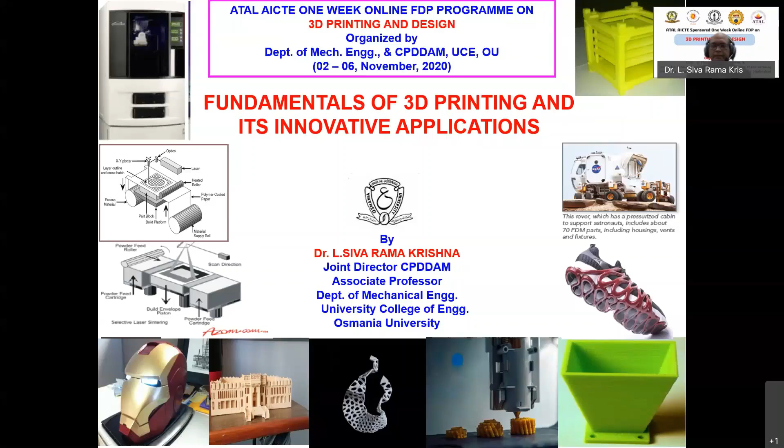Before that, I would like to say we have a state-of-the-art Center for Product Design, Development, and Additive Manufacturing. This was established in 2019, upgraded from the Center for Prototyping, Testing Industrial Products, established in 2009. This center has got so many high-end technologies like SLM metal 3D printer - what Dr. Padmanabhan sir said in ARCI, the same type of machine with an advanced version we have in our center. We have selective laser sintering, SLA DLP technology, Polyjet, Ultimaker S5 Pro, FDM 3D printer, and Artec scanner.

Professor Sriram Venkatesh is going to tell all these details, because the main person behind establishing this state-of-the-art center is Professor Sriram Venkatesh. His hard work and dedication made the center possible. He is the director of that center, and I am the joint director.

The outline is, as I said, fundamental 3D printing. I'll be concentrating on these areas: aerospace, sports, entertainment industry, food processing industry, jewelry industry, electronic industry, construction industry, interior decoration - this is another beautiful area where a lot of home interior decorators are using this technology. And I'm going to tell you what is the future of additive manufacturing, right?

Let us say the definition of 3D printing as given by Terry Wohlers is a technology that produces models or prototype parts from 3D CAD model data, CT MRI scan data, and model data created from 3D object digitizing systems. Simply, you can produce a product by using a 3D model. You can produce a 3D CAD model directly from scratch, or you can get it from reverse engineering by scanning the existing object, or if you're in biomedical, you can take a CT MRI scan, and from that, without developing any tooling or programming, you can directly produce the part.

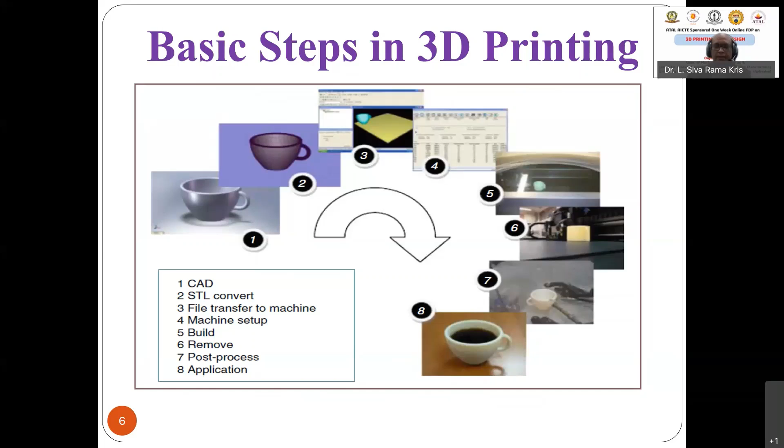Of course, in biomedical applications, how it is different, I am going to discuss in my next session lecture, because that session I'm entirely concentrating on how 3D printing can be used for biomedical applications. I hope you understood what are the steps involved in 3D printing.

Now, how do you classify 3D printing? There are different ways. For example, in the Chua textbook or other literature, they classify based upon the type of input material you are using - like whether I am using a resin, a liquid based one, or a solid based one, where solid means raw material in the form of wires, etc., or I may be using powder technology. As Sir was telling in the morning, metal printing, most of them are powder based systems, using fine powder etc. That's how they used to classify earlier - the old classification.

But now, as per the latest ASTM guidelines, they classify this into 7 ways. So on screen, even though I am starting with liquid, solid, powder as the basic one - liquid may be molten state or polymerizable. If it is a molten state, that means material extrusion process, like your FDM printer.

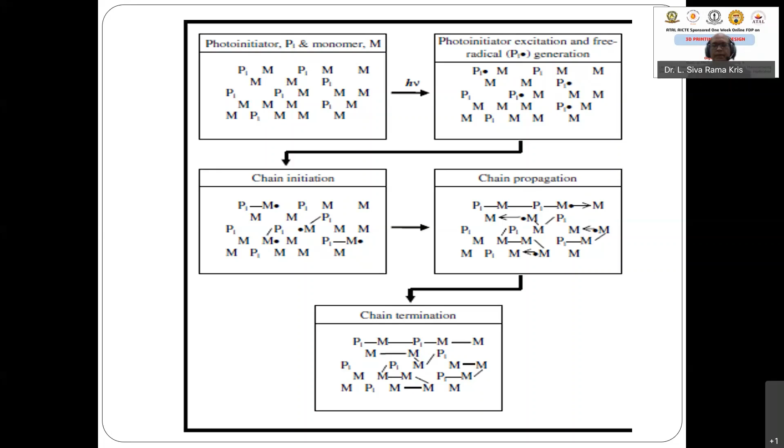Now, how is this process done - how is the part built in a vat-based photopolymerization technique? Let us observe this video on the SLA process, showing how 3D Systems uses this concept of building the part in SLA using photopolymerization. Let us observe this video, then we will go to it.

Are you able to hear the audio of this video? Hello? No sir, you are not able to hear the audio? No sir, it is not running now. But when I am running the video, are you able to hear the audio? No sir, we didn't hear the audio, sir. Okay, now I will explain.

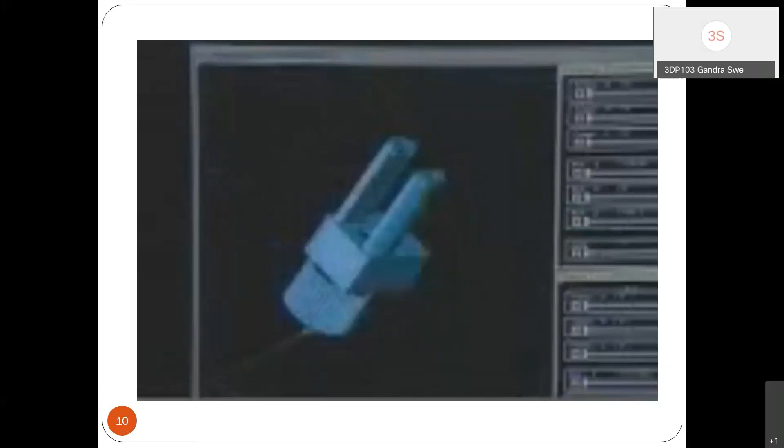So this is the you can see

You can see here the part is first sliced into a number of layers. Once you make a number of layers, the laser beam moves according to the cross section of each layer and exposes the liquid resin to that cross section. That liquid resin becomes hardened for that layer, and the platform goes down. Again, a new layer will be spread on it - you can see here.

So you can see here, this is sliced into a number of layers. Once we slice it, this is the build platform, and the liquid layer will be spread on it, and the laser beam will move in the XY direction. So the build platform moves in the Z direction, and the laser beam moves in the XY direction, and one layer gets exposed to that laser beam, then that becomes hardened.

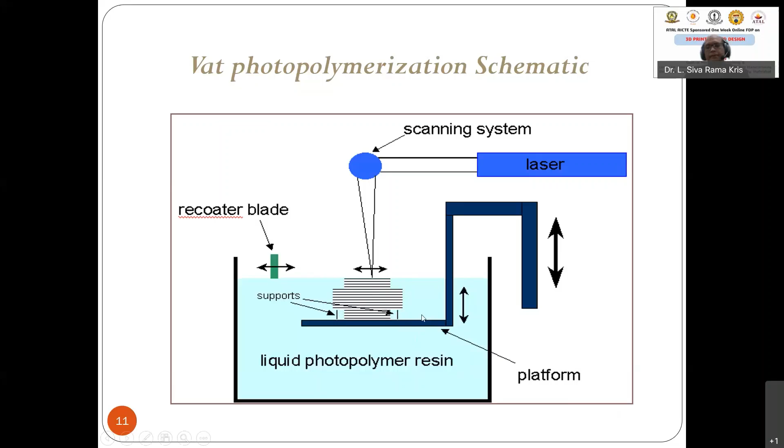Whenever you have overhangings, you require a support structure, because liquid doesn't have its own strength to support itself. You have to make separate support structures in this case. So this is what you see in a vat photopolymerization process.

The next most famous process you might have heard of is FDM. It is the most popular process used, and it is cheaper compared to SLA, because in SLA you are using a laser beam. Here there is no laser beam at all. You are using a heated nozzle and sending the wire through the heated nozzle and extruding it.

So this is called the material extrusion process. These parts have higher strength because you are applying some force, like in forming processes, where forming parts have higher strength compared to other parts. You are applying some energy which is stored in the form of strain energy. FDM also has higher strength compared with other processes, but the surface finish will not be as good.

Its key features are robotically guided plastic extrusion. They use thermoplastic materials - earlier it was thermosetting, now this is thermoplastic. Low temperature to high temperature metals, with accuracy of plus or minus 0.005 inches. You can have water soluble or wax support here. So that is how this material extrusion process works.

You can see in this video how the FDM process runs. Let me show the schematic diagram of what happens. The wire is used in a dual extrusion process - you have dual nozzles here. One wire is used for making the part, another wire is used for making the support material. When you send this wire through the extrusion nozzles, the nozzle heats that wire.

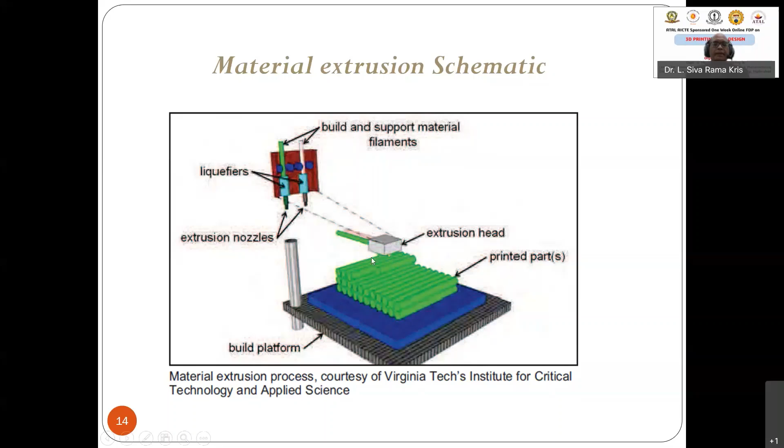In fact, we have a fused deposition modeling Ultimaker S5 Pro in our lab, and a demo will be shown to you of how that machine is used. The working principle is extrusion technology, and compared with SLA it has higher strength, but the surface finish is not as good as SLA technology because it's not a resin-based process. The support structures can be built from the second nozzle, and whenever you complete the part, you can remove the support structures very easily.

Let us watch this video on how FDM works.

Are you able to hear the audio now? Are you able to hear? No, sir. I'll see whether I can run the audio file directly. What is the problem, I don't know - yesterday it was running fine. Are you able to hear this? No, sir. Stop sharing. Is it asking for any kind of share file or share video option? I have to set the audio options.

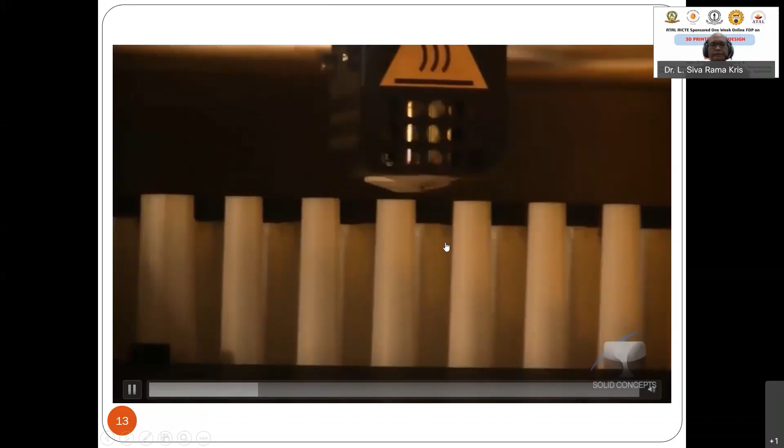You can see here, this is the nozzle through which it's a dual extrusion nozzle. It will produce, see how it is moving in building the part layer by layer. This is the nozzle through which you get the extruded filament coming out. These are the spools of wire through which it is fed through the nozzle. These are the two nozzles you have here.

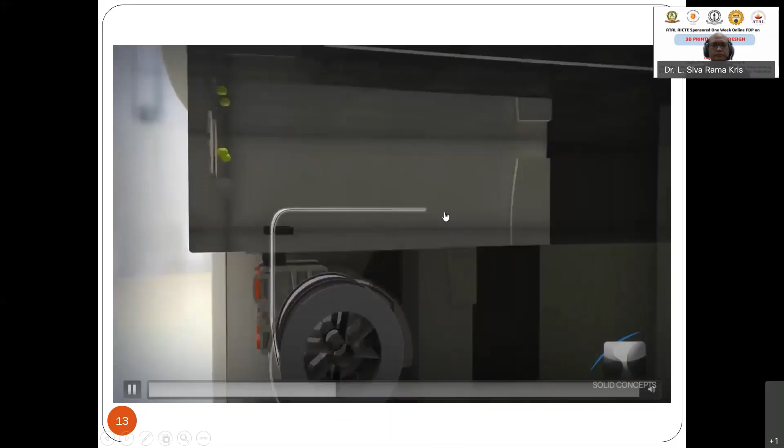By seeing the video you can understand. This is support material, one nozzle, and the other one is for building the part. So you can see such a complex structure you can build using 3D printing. This white color is the support structure and the black color is the actual part that you want to build. So both of them are built in parallel here.

See, the problem is surface finish. You can see, I am removing that. So you have to do some of these post-processing things.

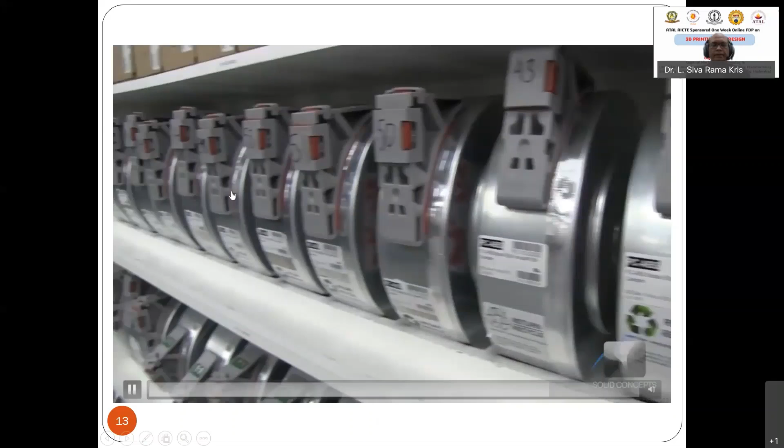You can have different varieties of spools of wire. You can use PLA, you can use ABS, you know, you are using composite materials also. Now there's thought, metal extrusion process is also coming up. It is fed in the form of wire and you are producing the part. That is your metal extrusion process.

So comes the material jetting machines. Material jetting process uses inkjet printing heads to deposit droplets of build material. So here the feature is you have a print head and support head, combining high precision milling and no ash content thermal expansion wax patterns for metal casting you can use. You can use it for jewelry, dental and medical applications, and you can get a high level of precision and high accuracy here.

So let us see how this technology is used for polyjet technology. We are going to have a demo of polyjet also in our center, we are having polyjet technology. Let us now see how this material jetting process is used for building parts using the polyjet process.

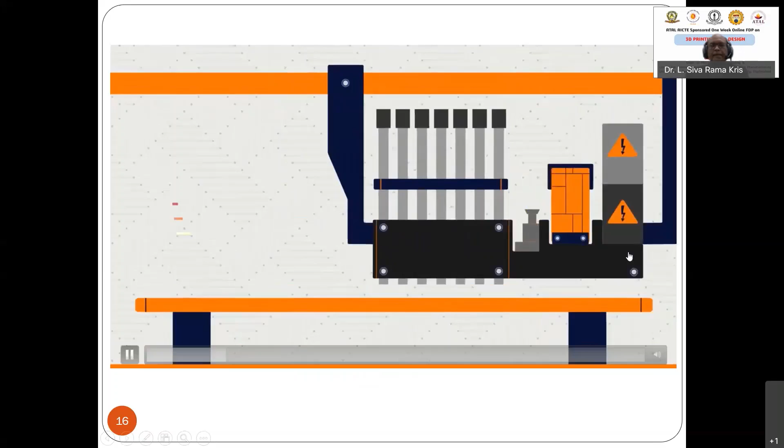It's like an inkjet printer that you use in your home. It will drop the liquid plastic and you have a UV light. We are having a Stratasys polyjet machine with us. So you can make heat resistant materials and durable materials. You can use it for prototypes.

So this basically helps a lot in biomedical applications. In the film industry also it is used a lot. This is developed by Stratasys, very famous, very high-end surface finish you can get here, but the cost of developing this process is very costly when compared with FDM and other technologies. When compared, it is costlier than SLA-based technology, right?

There also you use resin, here you use resin, but the way you build the part is different. It is jetting technology, so you are not using any kind of laser or X-ray, you are using a light, UV light here. So as you see in the video, this is what happens in material jetting. You are having drop on demand, DOD technology you call it.

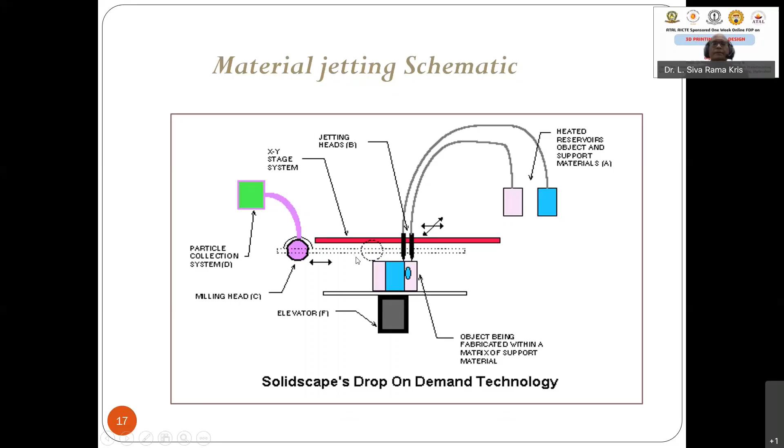Now coming to the next one is the binder jetting technology. Here what happens is, in the earlier case you are spreading the liquid through nozzles in jet-like droplets, like this. But in this case now I am using a powder.

In that powder I am dropping adhesive ink, like here also you have inkjet prints. On the powder I am dropping glue, so I am attaching one particle to another with the help of glue, and I am adding one layer after another, building the part.

The advantage of this technology is it's like a color inkjet printer, you can produce colored parts. For example, you want to explain to a student how a particular part looks inside, you can make it with different colors and give a good explanation to the student how it works. Similarly, if you are an architect and want to show your final building how it looks after coloring everything, you can build a part easily using this technology.

So here also I am not using any laser beam, I am not using UV light, but I am using a glue. That's why it's cheaper.

When compared with the selective laser sintering technology, it is not having that much accuracy and strength like your SLS process. It can be used for demos and prototypes, etc. So it doesn't require any support structures.

The reason is the particles which are not subjected to that glue will act as a support structure for the remaining part which are subjected to glue. So the overhangs, etc., below you have a powder that itself will act as a support structure.

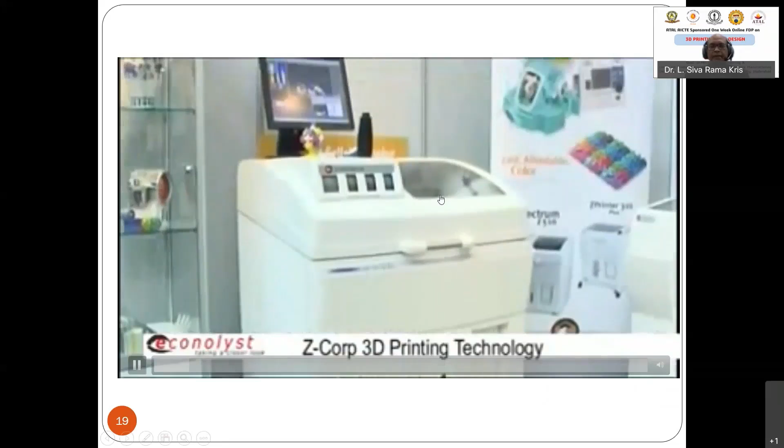It can be put in your office, no need to have a separate cabin and AC, and it doesn't require much setup cost. You can see the powder is in form, and this is the cartridge which is spraying the adhesive onto this powder. First one layer is built, then it will spread the next layer.

Because it's binder onto the powder, now you are putting the next layer, spreading the next layer, and again you are moving the binder. See how that part gets built up, each cross section, layer to layer.

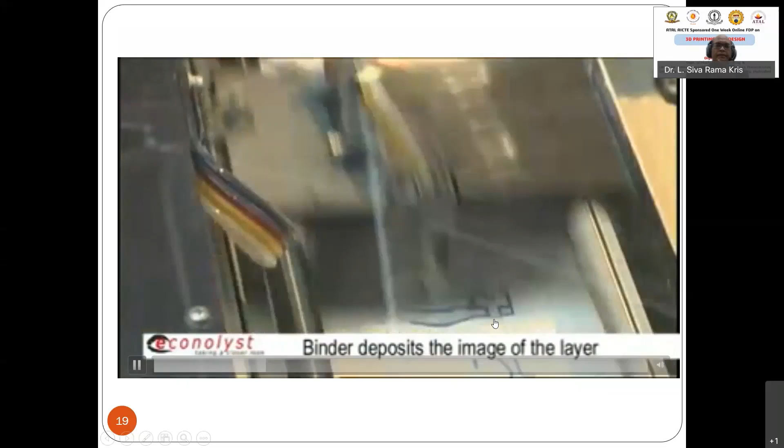So once you build all the layers, then you can remove that part, and whatever loose powder is there you can do air blasting to remove it, and then put this final part into liquid for getting better finish.

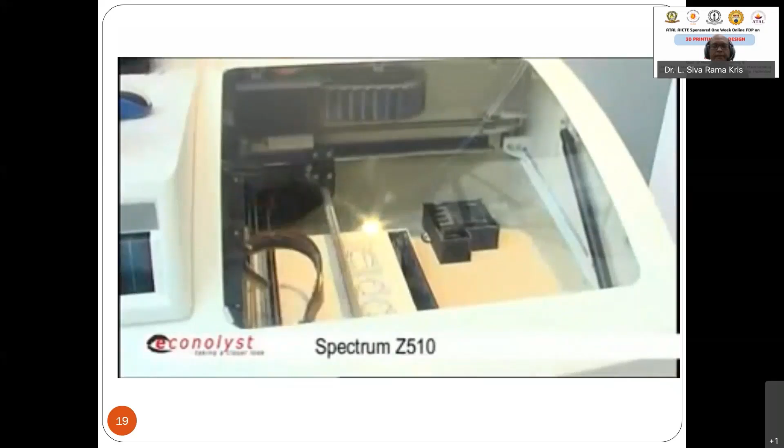So you can have colored parts here, because you change the ink cartridge color, like your inkjet printer you have a black cartridge and multiple color cartridges. You can use that and build a part.

And it is also cheaper and doesn't require any separate kind of cabin or other setups. So here is the concept model of a defibrillator.

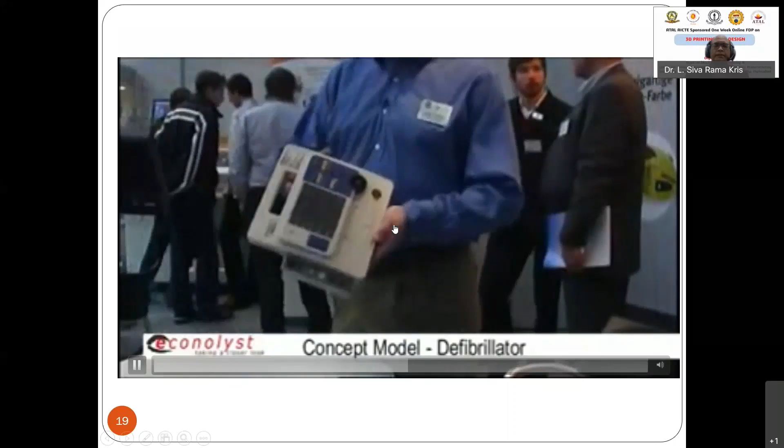So this device is used for communication process, and you can see you can get different colored buttons here. In a single step, you can make this entire panel, putting different kinds of colors to highlight what each part is.

For analyze, I put yellow, and for on, I put green. For stop, I can put red. So all of them I can print in a single head, and we can even print flexible rubber components using this technology.

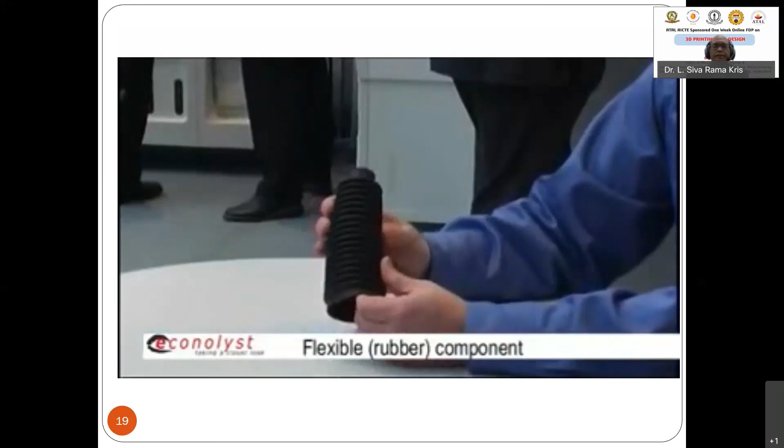You can see a combination, one side one color, other side another color. You can see this is orange and yellow. So a medical model for the doctor to understand can be used for pre-operative planning, etc.

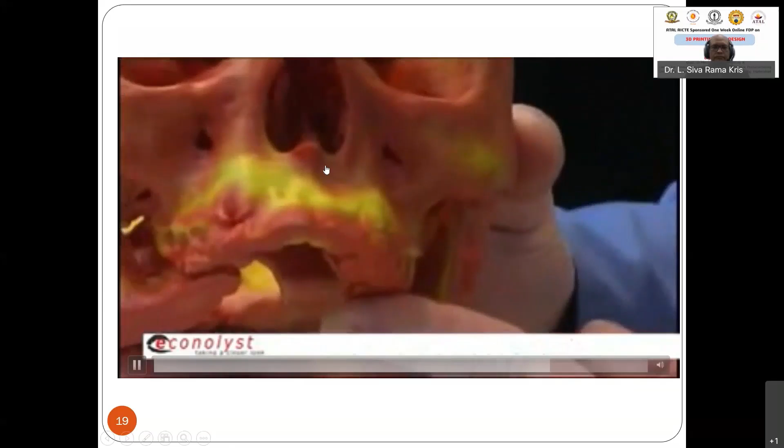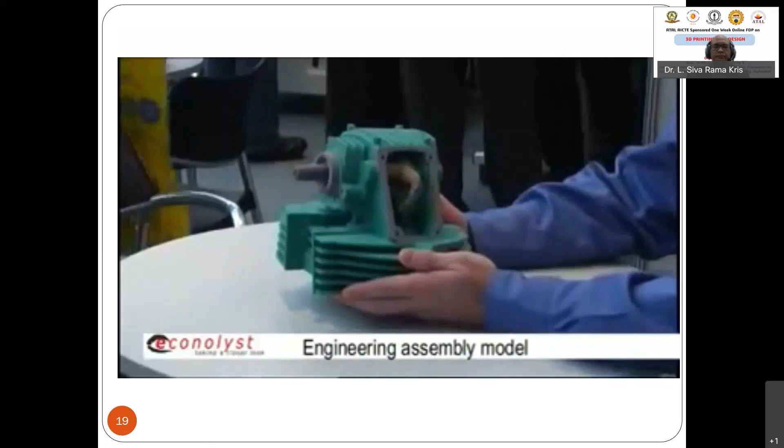People will understand easily based on color also, that is the advantage of this technology. This is how this technology can be used, this is what happens here in binder jetting.

You are having ink print cartridge heads and binder droplets coming out here, and you have powder, and this will fall into the powder and start attaching one particle to another, building the part. Here again the build platform goes down and this nozzle moves in the XY direction. That's how things are done in binder jetting technology.

Coming to sheet lamination technology, you are going to add one sheet over another sheet. The raw material is in the form of sheet, and that sheet has got, on the sheet, you put a small glue like this, and then you send a laser, it will heat it.

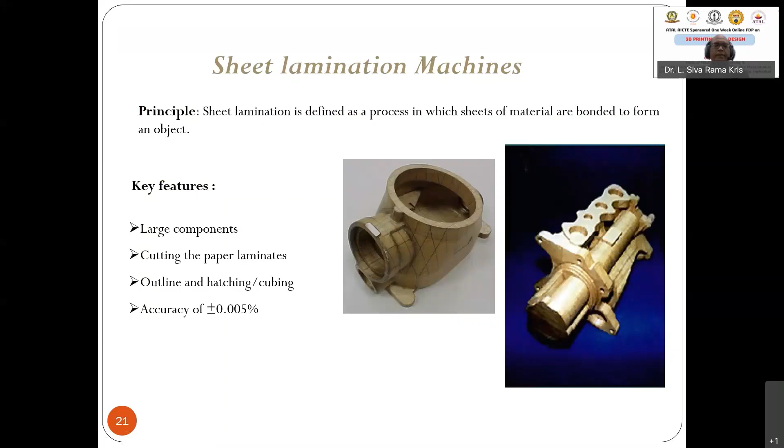That one attaches to the next sheet, and on that you press a roller. So you can make large components, cutting the paper laminates, outline and hatching, etc. Let us see how this technology can be used.

So this is how an LOM machine works. See, here again I am using a laser beam, and this is the sheet material.

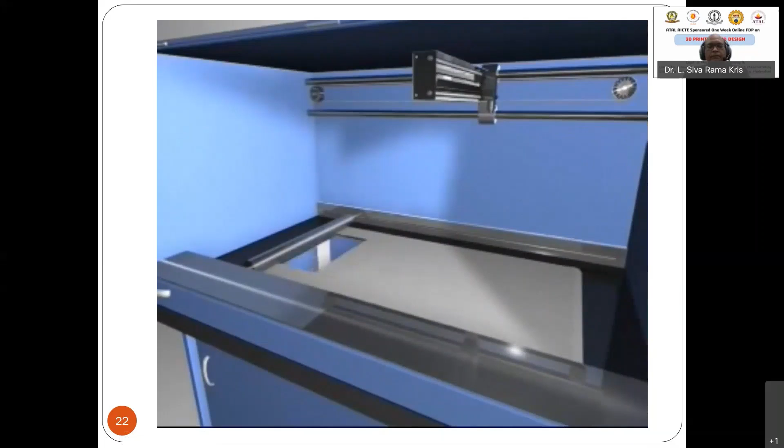This is how the laser will move on each layer. The paper is pulled by the roller to the other side, and the laser will move in the XY direction. So this is how the laser is moving in the XY direction here.

So what you can see here is the sheet material in the form of a roll, pulled by this roller to the other side. The laser beam will move in this direction, and it will first outline the portion of the cross section you want to build, exposing that laminate. Once done, the remaining portion will be hatched, and that will act as a support structure.

Once this entire layer is built, it gets attached to the build platform below, and the remaining paper is pulled up by this roller. You can observe here how this process is going on.

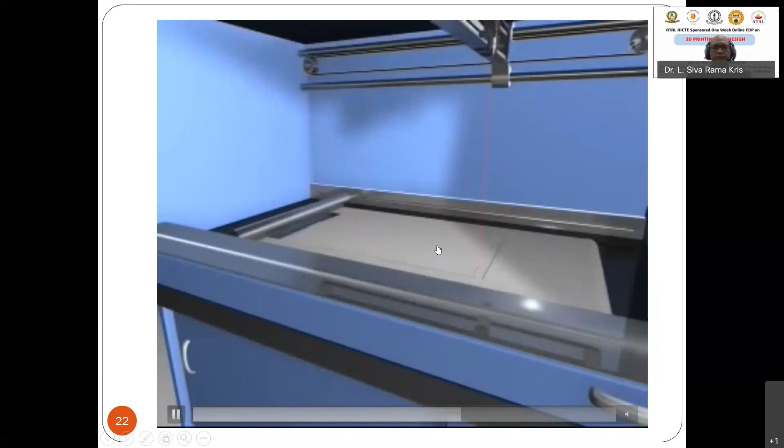So here no separate support structures are required, because the hatched portion, which is not part of the object, will act as a support structure for your part. Like this, the entire part can be built up here. It is easy to remove the hatched portion very easily, and then you get the final part out.

This is how you can produce the part, and the metal can be reused. This is the schematic diagram of this sheet lamination process. The roller pulls up this material, and the laser moves in the XY direction. For example, this is the cross section you are making, and the remaining area it will hatch, so it is easy to remove, and this portion acts as a support structure for the actual part you are building.

This is called LOM, laminated object manufacturing, and adding one sheet over another sheet is your sheet lamination process. It can also be used like an ultrasonic additive manufacturing process, where you put metal sheets and fix one sheet of metal to another using the ultrasonic process. That's the latest one coming, a metal based one.

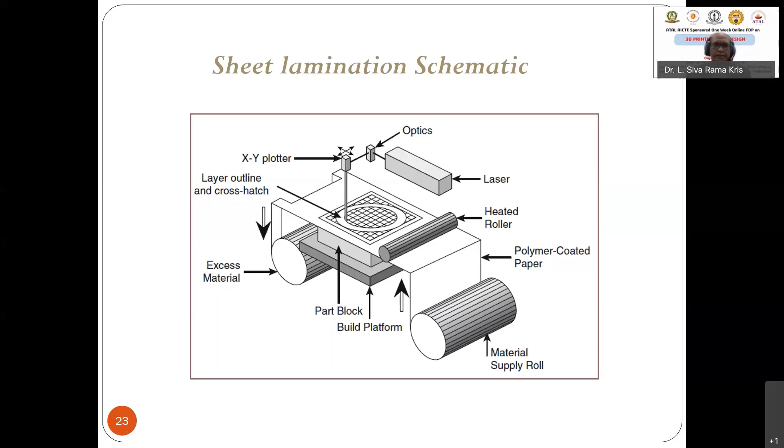Then you've got the powder bed fusion machines. Here the input metal is in the form of fine powder, which when exposed to high intensity light, as in selective laser sintering, becomes semi-liquidous, and sintering causes it to start attaching to the next particle. In a sintering process, you are not completely melting the particle, just exposing it to a certain temperature so it becomes semi-liquid. Since the particles are circular in shape, there will be a gap between two particles.

Only where contact occurs will they attach, but elsewhere there will be some gap. So the problem with this technology is the density of parts you get is only around 70 to 80%, not 90 or 99%. But in the case of SLM, selective laser melting, you get a density of around 99.9% because you are melting the entire powder. For example, in DMLS, direct metal laser sintering, or selective laser sintering which is polymer based - we also have that, it's a Formiga P100 - that density is not as good as SLM technology.

Here you can use thermoplastic materials and a broad range of metals. Accuracy goes to 0.005%. No support materials are required because the unsintered powder acts as a support for the sintered part. You may use polycarbonate, nylon, wax, GF nylon, ceramic - these are different raw materials used for making parts with powder bed fusion technology.

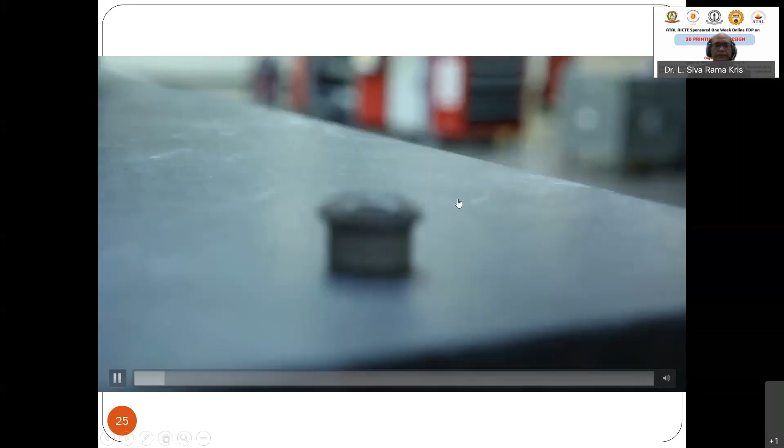Let us see how this machine works. It's a direct metal laser sintering process. You can see the metal powder, and you can make such a complex part in a single go.

As the morning speaker Professor Dr. Padmanabhan sir was telling, aerospace is using this technology a lot. Aerospace and biomedical fields are using this technology a lot, so you can make such complex contours and channels, internal cooling channels, etc., using this technology.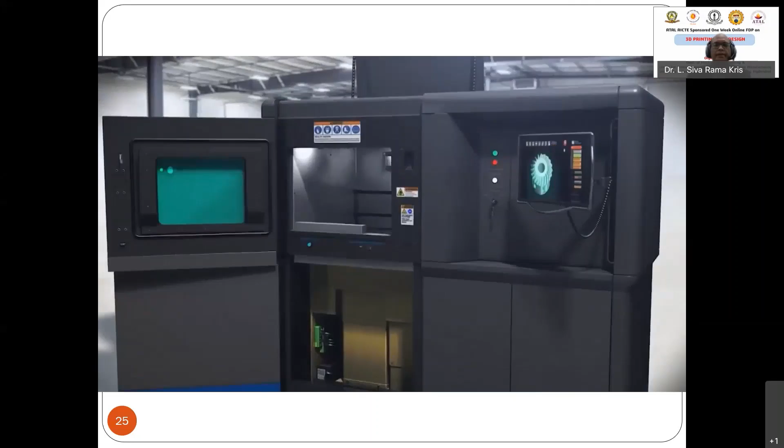So as usual, you first make the CAD model. Once you make the CAD model, you see how he is doing the orientation, and then you slice it into a number of layers. Based on this, before building the part, you can see how each layer looks. This is a component of your machine, and this is the build chamber where you are going to actually build the part.

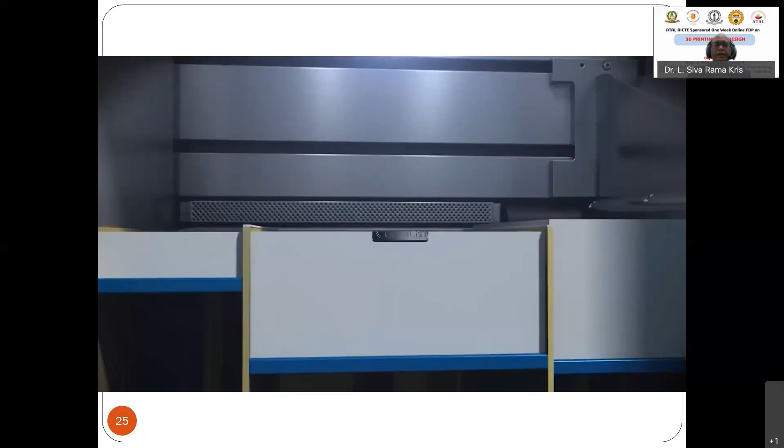So now you are putting powder, spreading the powder with the help of this coater, and now that laser beam will move on that powder, and according to how that laser beam moves the cross section, the part will be built up here. So you can see how it is moving. So here you can have a scanning. You will generally use a fiber laser in metal processes.

In our case, SLM, we are using a 400 watt fiber laser. You can also use dual laser technology. But in this process, or in SLS technology, you should be careful that the powder should not be exposed to moisture and humidity, otherwise you will get a granule-like structure and part failure will occur.

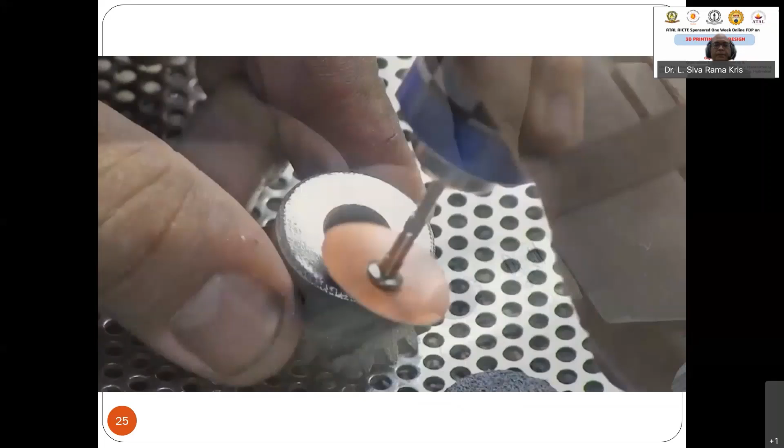So you can see the part is now attached to the bed, like welding. So now you have to separate that part from the build plate. Then you have to do post processing, like filing or some kind of grinding. Then you may do some coating on that one to have better surface finish. So directly that complex gear can be produced using this DMLS technology.

You spread the powder, the laser beam moves in the XY direction, the particle gets exposed to that, and then the platform goes down. Then the next layer is spread by the roller. Again the laser beam moves according to the cross section and the platform goes down. Like this, the part is built up in this way. This is your powder bed fusion technology. So next I am going to tell what materials you will use, everything.

Then next comes the direct energy deposition machines. Your direct energy deposition process focuses thermal energy which is used to fuse material by melting as the material is being deposited. The most famous one is LENS, laser engineering net shaping, and then you also have electron beam melting. This was developed by Sandia Labs in 1990, and Optomec was founded in 1997; they also use a fiber laser.

The type of materials you can build include titanium, stainless steel, Inconel, and you get full dense parts with good metallurgical properties here. So the density of parts produced using this technology is higher than SLS or DMLS technology, and the thing is very costly. So here the difference is...

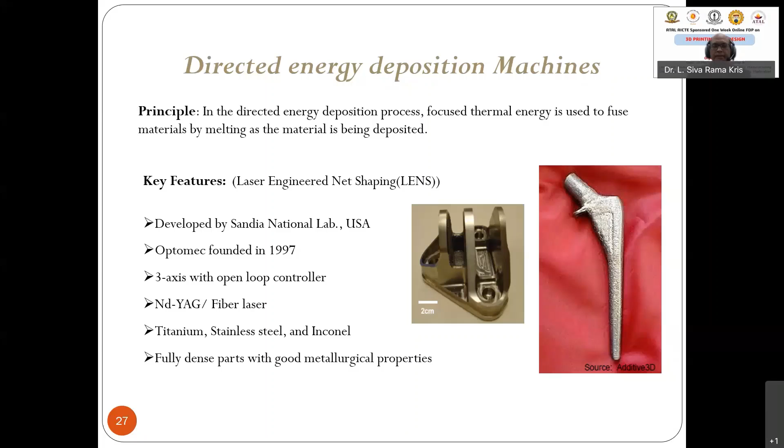So you can see here, in this case, the DED process: the feedstock metal, which comes in either metal powder or wire form, is pushed through a feed nozzle where it is melted by a focused heat source. So in the earlier case of the SLS process, the platform goes down, but in this case, the platform is fixed. The nozzle which is building the part will move. The first layer comes here.

In the nozzle you have two sides. I am going to show the schematic diagram. You get powder from two sides, and you get a focused beam coming through the center. So this platform is built. The platform is fixed, and the nozzle will move up and down, that's how the Z direction is achieved here.

But in the earlier case, the platform would go down; here the platform is fixed and the nozzle moves up and down. You can also use this for making functionally graded parts using this technology. Let us see this video on how this technology can be used.

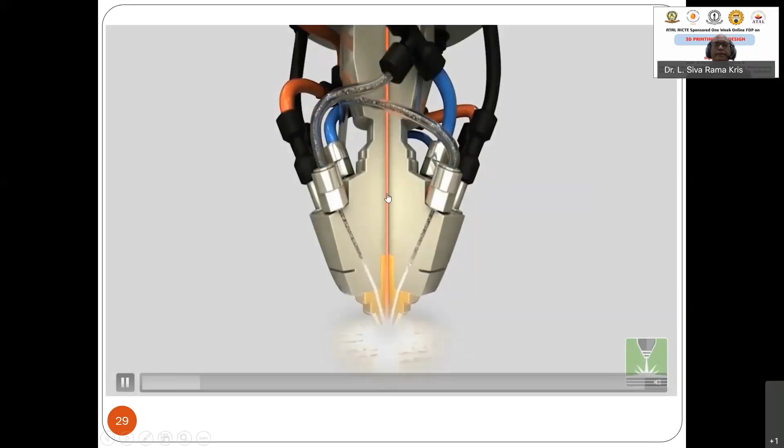You can see how the powder is coming. This is the laser coming, at the center. The powder is coming from two sides. That's how the part is built. So you can get functionally graded parts out of this.

See how the part is built up. Such a complex part you can build very easily.

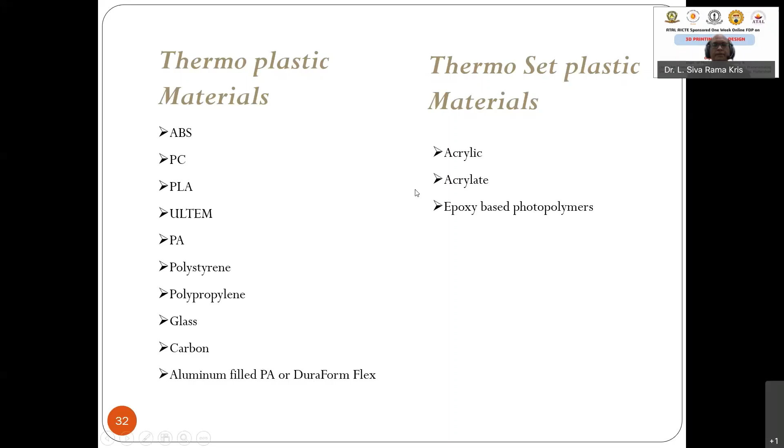Thermoset plastic materials are acrylic, acrylate, epoxy based photopolymer. These are the things used in this type of material. And metal materials used are tool steel, stainless steel, commercially pure titanium, titanium alloys, aluminum alloys, nickel based alloys, cobalt chromium alloys, copper based alloys, gold and silver.

So material means don't think only this. Now people are thinking of bioprinting. Even the tissue cells are now started. Bioprinters are coming. Those materials are all now in the process of research. So in future you may get bioprinted organs in another 10 years. It is still in the research stage. I hope once the ethics clearance, everything is done, this will also become a popular area where a lot of research is going to happen.

Bioprinting, right? And if you see material versus technique, polymer blends, you can use it for material extrusion, material jetting technology, binder jetting or vat photopolymerization, sheet lamination and powder bed fusion, etc. Composites, you can go for material jetting and binder jetting, vat photopolymerization and powder. Metals, like this you can use in all these applications.

Graded hybrid metals, this is as per Wohlers associates. Wohlers are the pioneers in additive 3D printing, where they publish every 6 months the latest happenings in additive manufacturing technology. So you can visit Wohlers associates to find out what are the recent developments in additive manufacturing.

So if you compare these various technologies like material extrusion, powder bed fusion, vat photopolymerization, material jetting, binder jetting, sheet lamination, direct energy deposition, you can see these are some of the strengths. For example, if you see material extrusion, your strength is inexpensive extrusion machine. Cost of the machines in FDM is very cheap. Now you are getting FDM printers even for 10,000 rupees.

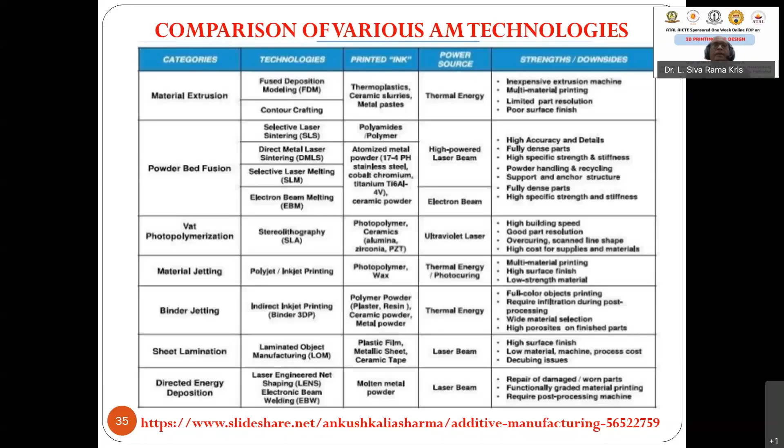But this direct energy deposition will be still higher, and the maintenance cost also will be higher in this case. So these are some of the comparisons between this. Now let us see the innovative applications of this technology.

As I said, we used our FDM technology for making a small CubeSat. Using our FDM printer, we are able to make the CubeSat. CubeSat is a nano-satellite, a miniaturized structure ranging from 1 to 10 kilograms, in the form of a cube, hence it is called CubeSat. The advantage is 1U is equal to 1.33 kilograms.

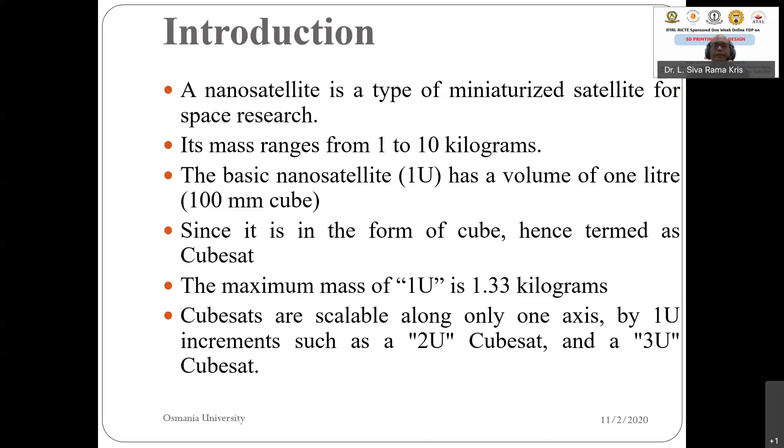It's modular, so you can add one unit to another, making it 2U, 3U, etc. We took these dimensions from California Polytechnic State University for making the CubeSat parts, all the dimensions.

Then we selected from different types of structures available. Finally we chose the pumpkin structure because it has fewer varieties of parts, making the design simple, and you can easily expand from 1U to 1.5U, with less manufacturing time and cost, and it's easy to assemble, disassemble and repair whenever required. That's why I selected the pumpkin structure.

Then we modeled this in CATIA, and produced it using Ultimaker. We produced everything, including the bolts and nuts. Inside these racks, you can put the printed circuit board and make a CubeSat. Such things can be used in future space technology as well.

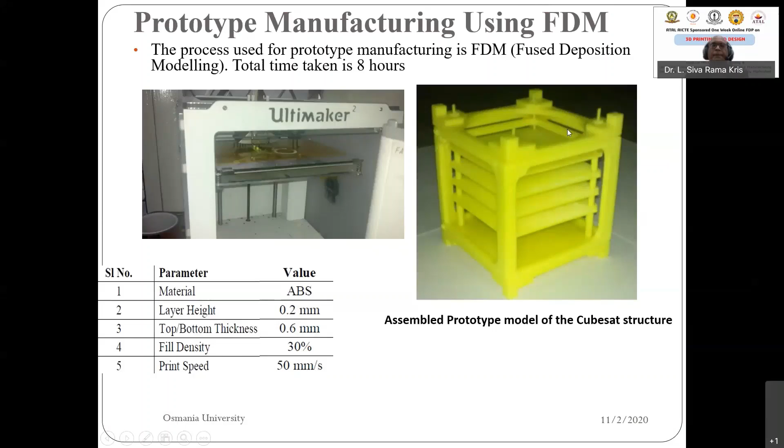Now, as I said, NASA is developing a rover which consists of 72 FDM parts, and this is being tested in the Arizona desert because they are planning to send 2 astronauts to Mars, who will have to stay there for 1 to 2 years. This is a proposal, I don't know how feasible it will be, but they are doing all this work. The rover is already built and being tested in the Arizona desert.

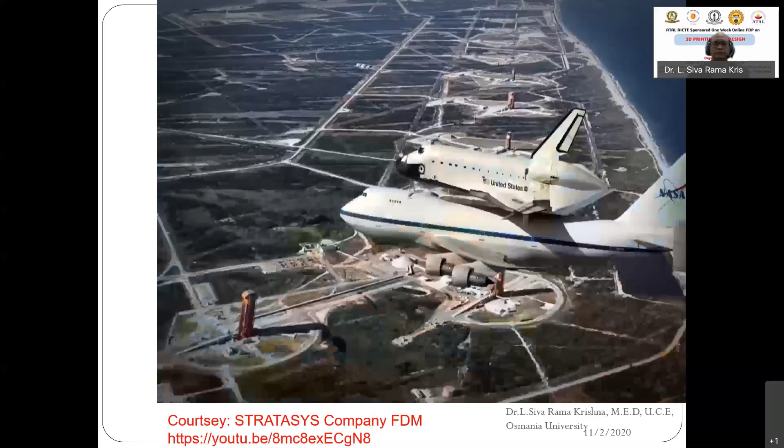Let us see this video of how that rover is built.

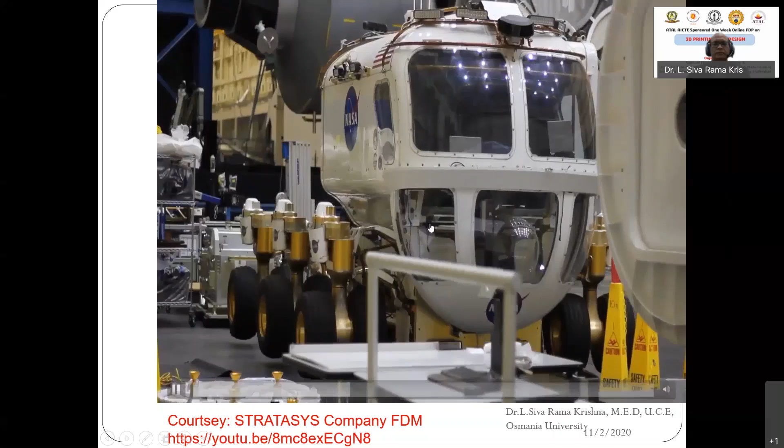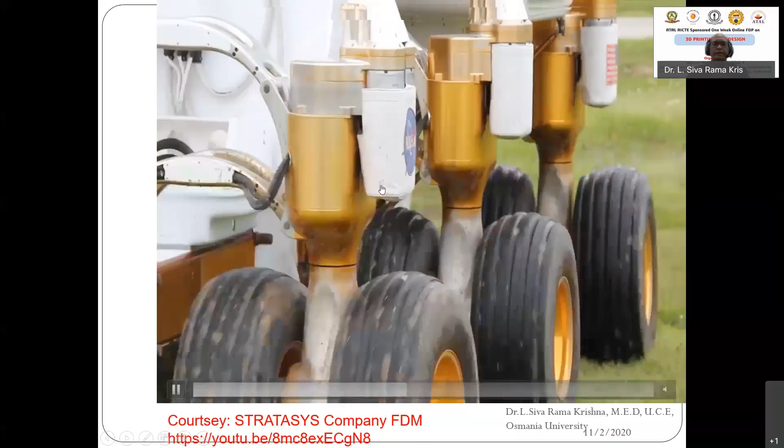This is the cabin in which the astronauts have to stay, like an SUV which will carry 2 astronauts. All the rims, internal electronics, AC ducts, everything was made using 3D print FDM technology. Stratasys was used so that strength is not compromised while weight comes down. This is the Mars rover where 2 astronauts will be taken from Earth. These are the parts produced using 3D print technology.

The entire door is made using 3D print technology. The electronic control boxes are also made using 3D print technology. I think there is some issue here.

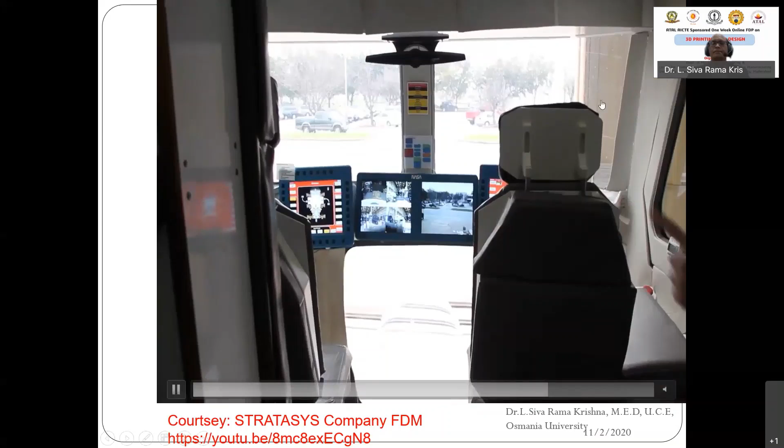You can see the entire panels of this monitor, and these ducts for AC, everything is done using 3D print technology.

Now even our Indian airspace, our Tejas aircraft, according to U. Chandrasekharan sir, who is one of the speakers in our FDP and is coming I think on Thursday, even in the Tejas aircraft, about 2,500 parts are produced via FDM additive manufacturing process, including the Kaveri engine.

They produced the things within 1.5 months instead of the 12 months taken by the conventional method. Even the cost of building the part came down from 60,000 to 20,000, saving around 87.5% in time and 66% in cost using 3D printing technology.

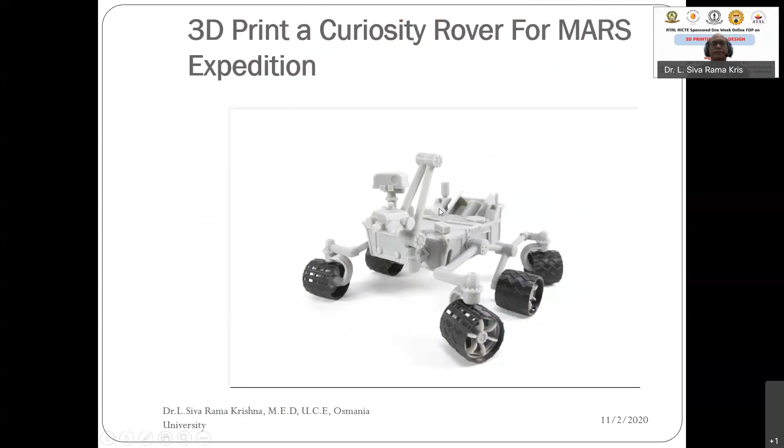Even the entire Curiosity rover sent by NASA to Mars, all the parts of this rover are built using 3D printing technology. You can see these parts, the louvers, everything. They modeled everything, stacked all these parts in the Ultimaker machine, and used Cura software for stacking the parts, then produced this.

As I said, if you see the sports industry, things like the stump wicket system, as I said, use 3D print technology. The shoes, the golf bats, or the helmet the batsman is wearing - all of them are produced in a single step using 3D print technology. Such a complex thing you can make in a single step.

This is called a Zing wicket system, done by Bronte Eckermann. This is a very famous wicket system used everywhere.

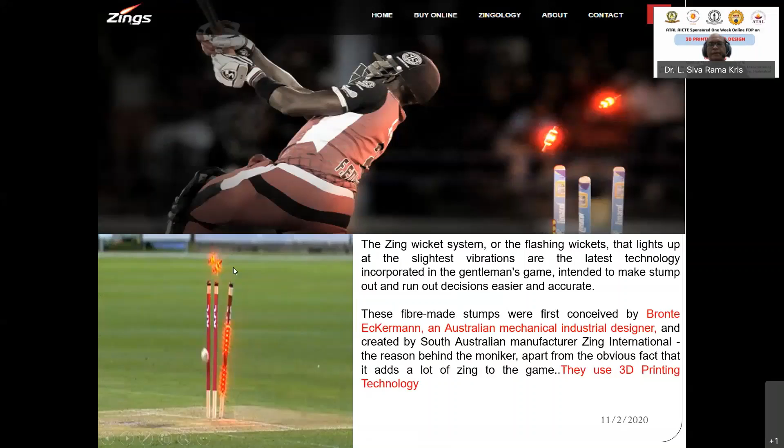The material they used is urethane based liquid. See how this is used in Reebok liquid speed shoes manufacturing. Earlier they used to use conventional molding process to make the shoes.

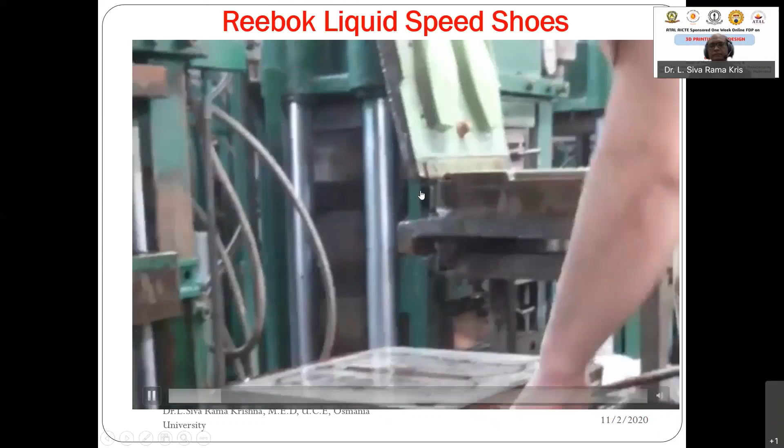Using a mold method, most of the companies were using molds at that time. And their shoes are expensive because molds are expensive.

And this is your nozzles they are used. This is called Liquid Factory Lab.

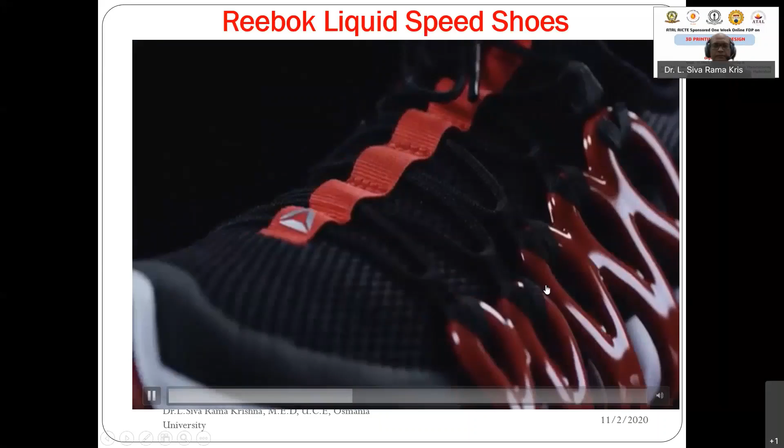You can see how the liquid is moving. This is the bottom of the shoes. It is called outsole.

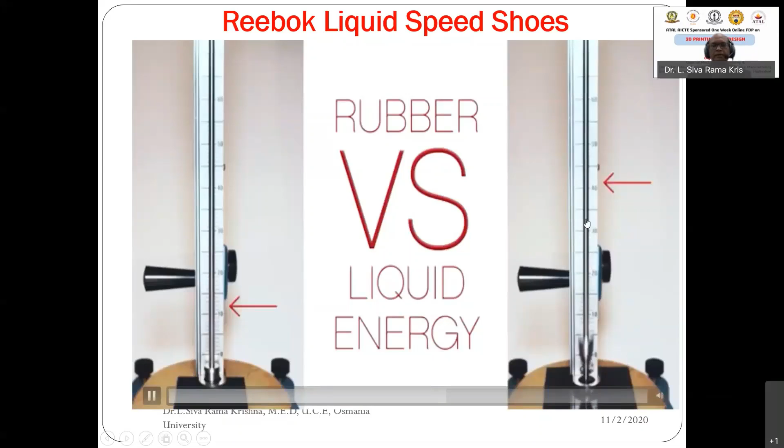They are filling up this gap with a high energy material. It has got twice the energy of this one. So it is tightly fixed to your outsole. That's why you are able to easily move.

Not only Reebok, but Adidas is using digital light synthesis process, using carbon and polyurethane, it's called. They use this material for making midsoles, uppers, and other parts.

And Nike uses selective laser sintering, and the material uses thermoplastic polyurethane powder. They are making midsoles and uppers, etc.

Similarly, SLA also they adopted this for making rubber durable resins, and Under Armour and New Balance are using these technologies. Reebok is using material extrusion liquid drawing process developed by Reebok itself, a patent type of technology they developed, and they are using it for making midsoles, and also for uppers and other things.

So they are using this technology of material extrusion. They are using raw materials, polyurethane or thermoplastics, etc., and then producing the parts. So what you can observe here is even the shoe making industry is adopting this technology a lot.

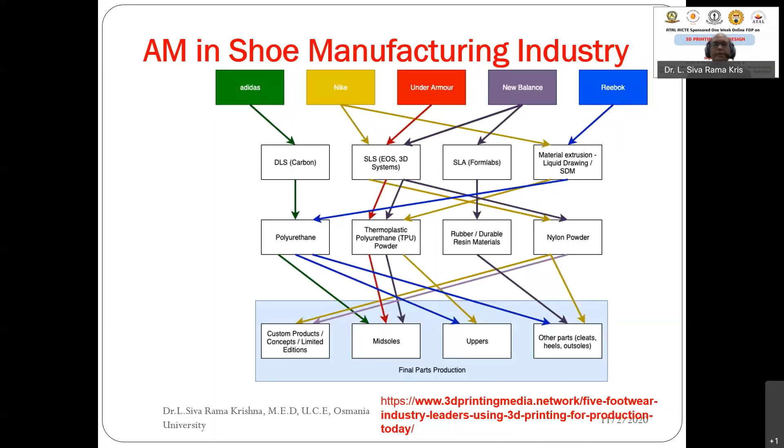So based on application, you can go back and start doing the research. And definitely in 3D printing, you are going to have a useful product out of your research. That's what your research should be aiming at. It should have some kind of live output, not something written in books and stored. It should have some live product coming out of it. That's where 3D printing is challenging for many of us.

Even in the film industry, now they are using this technology a lot. For example, you might have seen Hollywood films, all these films I am showing here. Even Jurassic Park of '93, they used the SLA technology for making the horns of the dinosaurs. I will show the video clip next time.

So here, you see the movie called Pacific Rim. I don't know how many of you watch Hollywood movies. The great thing about Hollywood movies is the story is not so complicated. The story is simple, but the screenplay is very beautiful. The magnitude of the screenplay, what you see on the screen, is amazing, right?

You see the war in Lord of the Rings, how that war is done. How is it possible to create such a big war on the screen? That is possible because they are scanning each actor at different positions and producing their figurines, small objects, and putting them in different action sequences. Once they put that action sequence, they record it with high-end cameras, then input it into their computer software and add effects to it. There is a studio in Hollywood called Legacy Effects, which adopts 3D printing a lot in making such wonderful movies.

I hope most of you have seen movies like Iron Man 1, 2, 3, Lord of the Rings, and Man of Steel, Superman versus Batman, or the Superman Krypton City. The entire city is made using 3D print technology, the green colored Krypton City. Why am I talking about the film industry? Because high budget films are coming up now, and people are not hesitating to pump money into making such wonderful movies, and that is possible only with the help of this type of 3D print technology.

So all of us should think about innovation, how you can use this technology for different areas. If you have a skill set of 3D printing and you are very interested in the movie industry, you can get a job there. You just need to have the skill set.

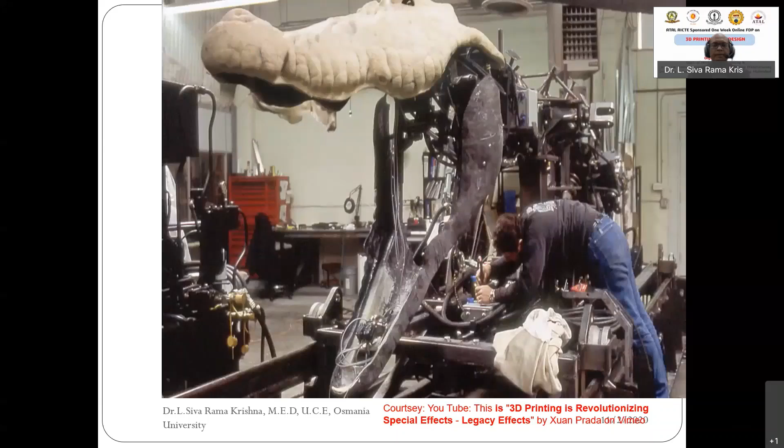See how many engineers are working in the Hollywood industry. It was started by a computer guy, a mechanical, electronic guy, and an architect. All of them formed and developed this Legacy Effects. You will not find it's like a film, it's an industry, it's a manufacturing industry like that, you can see.

I am going to finish within 2 to 3 minutes. See, the actors are scanned, they made the figurines, and see how the war sequence is built here.

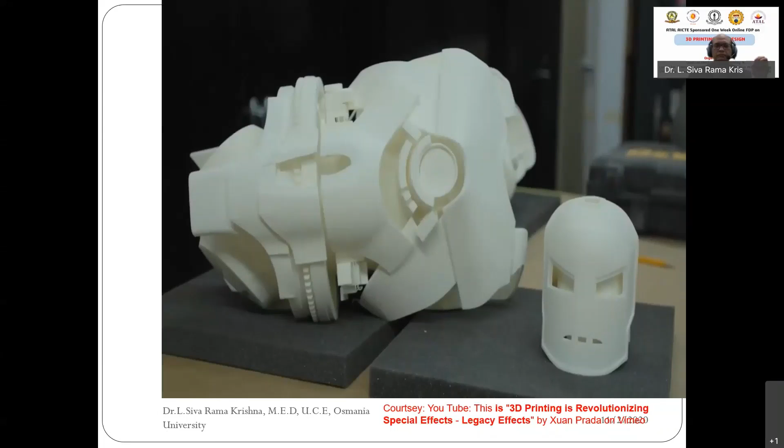See this, now how to use this technology, you just think about the area and you can go and work there. The Iron Man suit is completely made using 3D print technology, in modular pieces joined together. See this entire thing, it's all made with FDM, but the painting is done in such a way that it appears like a metal product.

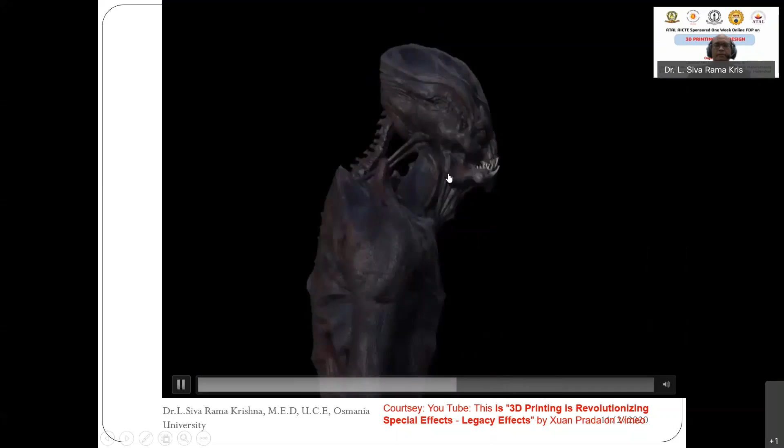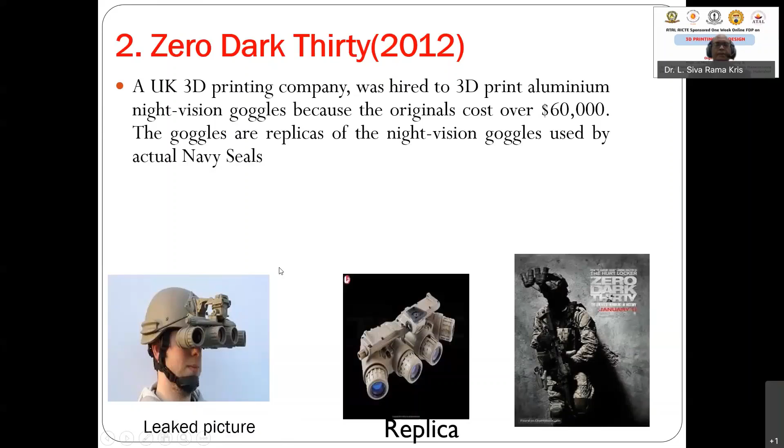So in these movies, you can see the suits, the masks, everything, they are using 3D printing. Like in Iron Man, all these parts are produced using the FDM 3D printer, material used is PLA. Similarly in Zero Dark Thirty, the movie about killing Osama bin Laden, the Navy SEALs' goggles would cost 60,000 to buy. Instead, they made a replica of it using 3D print technology. Similarly in the Hobbit trilogy, all the masks and innovative weaponry, which you would never think how they could make, were produced using 3D print technology. Even in Guardians of the Galaxy, the special space guns etc. are produced using this technology. So 3D printing is big in the entertainment industry.

Now in the food processing industry also it is used a lot. NASA is planning to send, along with the rover I showed you, a 3D printer, because when they send astronauts to Mars they have to stay for 2 years to conduct all the experiments. For them, food has to be produced. The challenging task is you cannot send food from here because it will get damaged by the time it reaches Mars. So what they are doing is taking all the nutrients required for the astronaut, making everything in powder or dry form, and sending it to Mars.

And there they are putting in the nozzles of the 3D printer and producing the required food for them based on the nutrition requirements. So based on that, they can make customized food for the astronauts, right? Like you can make a pizza or a pastry, etc.

So they use technology like binder jetting or material jetting, because the main thing in food processing is paste extrusion process is important. So indirect molding you can see. So this is why you need 3D printing for food.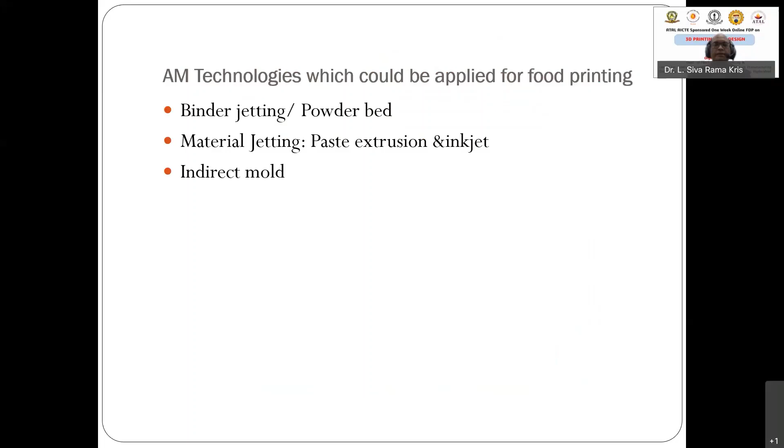So it depends on your requirement. You want to have a nutritious food, well balanced. You can have a combination of high protein content or less carbohydrate. You can mix with the different nozzles. You can mix and make that food. That's what you can see.

But there are some challenges in using 3D print technology for the food industry. The main challenge is material science stability, replicate traditional foods, and the flow of that food, rheology of the food is very important. Stable print materials, and safety you have to ensure for easy cleaning surfaces, and you have to go for high throughput or large reservoir needed for fast printing.

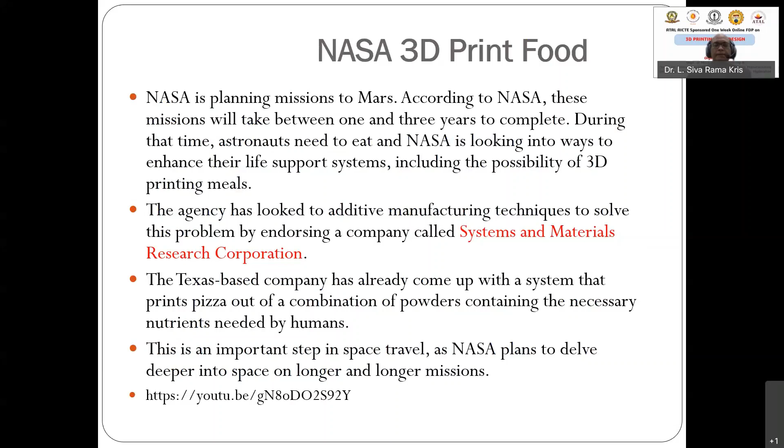And speed, you cannot produce mass quantities using 3D print technology. You can go for customized low volume production using 3D print technology, right? So NASA has given this order to Systems and Materials Research Corporation. They are now developing this printer for putting in space for the Mars expedition. So this is not far away. You can see how they plan to make this food.

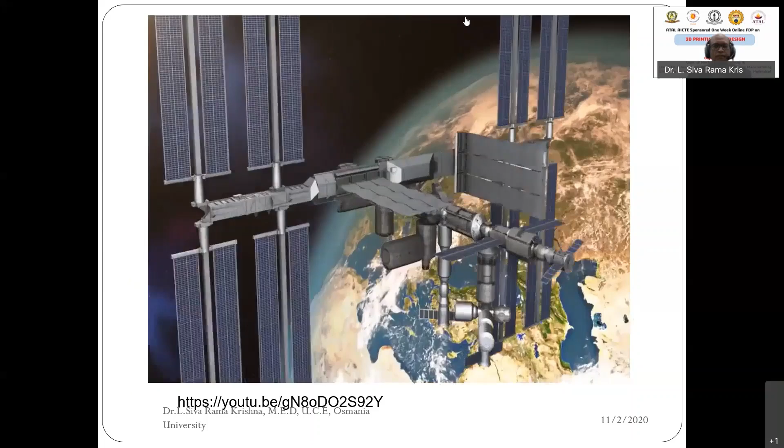They are using fused deposition modeling technique. See how the food is printed. So you require a non-perishable food here.

So in the jewelry industry also you are using this technology a lot for making very intricate and complex jewelry. You are using this technology. Well, why in jewelry? Conventionally, if you want to have a different type of jewelry, customized jewelry, it is very difficult to make using the conventional process.

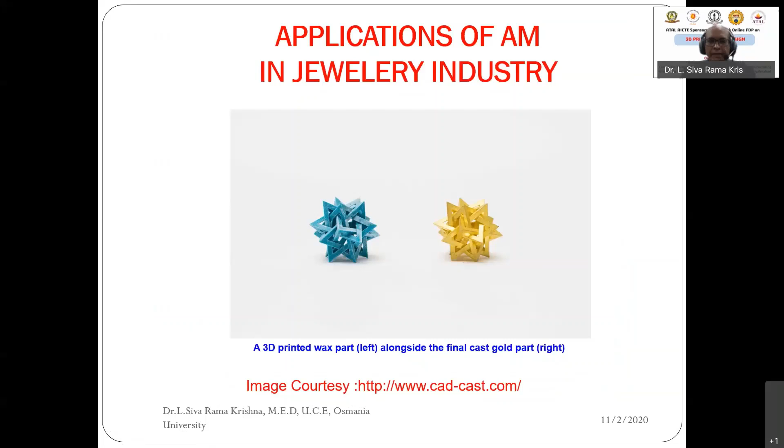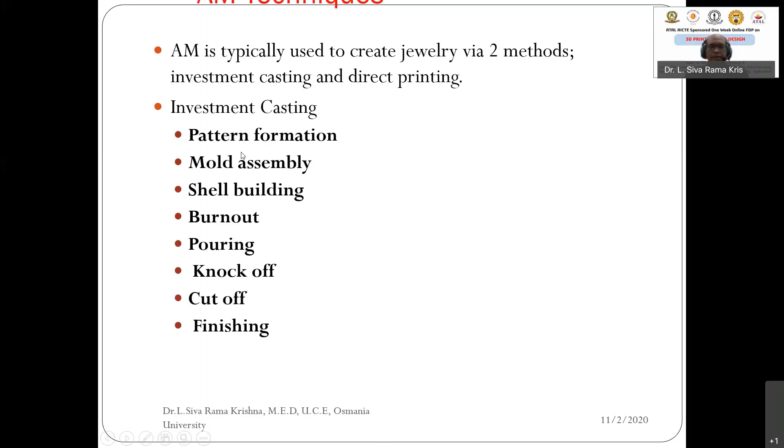Now there are two methods in which you can make jewelry. One is investment casting and the other is direct printing. In investment casting it's called an indirect tooling process. What you do is you make a pattern. Like in investment casting you first require a pattern. That pattern is made using 3D print technology. You can adopt SLA or DLP technology, and you can make a wax pattern.

Using that wax pattern you can join it, and then do shell building, then dip in the slurry several times until the required layer thickness is obtained. Once you obtain it, you heat it and burn out the wax. Then inside this you pour the liquid gold and get the required gold or whatever jewelry material you are using.

This is the indirect method. Most companies are adopting this technology. It is cheaper and you can make very intricate components. But now people are even using direct jewelry making using the powder bed technology. These are the technologies used for jewelry making.

SLA, DLP, they are used for making these parts, right? So different companies have Form Labs, DWS, 3D Systems. We are actually going to have a demo on SLA DLP technology, which can be used for making even jewelry type stuff. You can make patterns using the technology. So this is the jewelry produced. There is a cast jewelry.

For direct metal printing you can go for DMLS or SLM. You can use gold powder and make the part finally. So this is a direct printing technology.

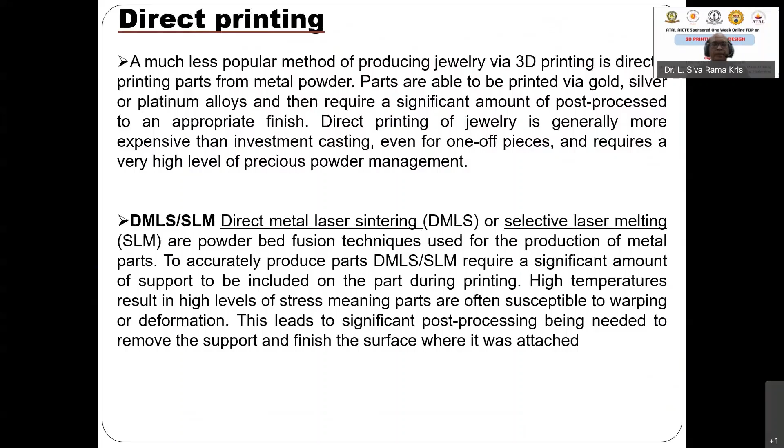So this is another area where 3D printers are used a lot. They have dedicated software like Rhinoceros or JewelCAD, etc. to produce the part. So these are the advantages: you can go for customization and reduce the production time also, which is easily achievable.

But these are the limitations. The accuracy is somewhat minimum, details you can get up to 0.2 to 0.3 or 1. There are burn-out remnants - when you burn out the wax, some small residue adheres to the actual part, which affects the quality. And support removal is another issue, because in SLM or DMLS, the part gets attached to the supporting bed, so you have to separate it, meaning support material is also involved.

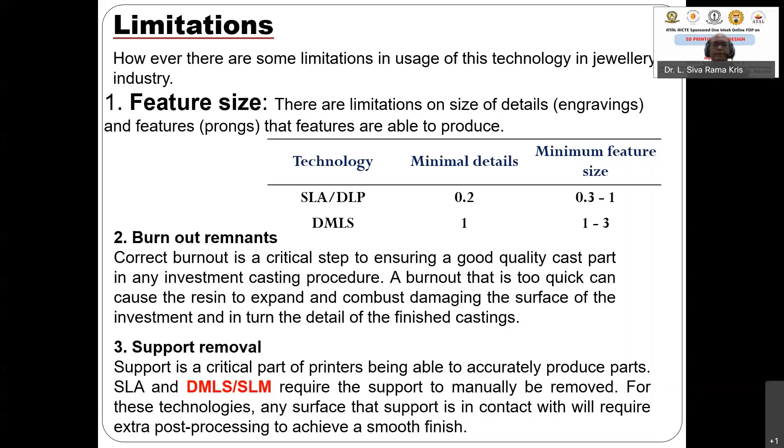So when you remove all those things, that will make some effect on the surface of the fine jewelry. So these are small limitations of this technology. In electronics, as I said, we use this technology for making horn antennas. We made a horn antenna using FDM technology.

In the electronic industry, the most popular way of using 3D printing is aerosol jet printing technology. It avoids clogging of nozzles, etc. Using this technology, you can produce the entire cell phone, all the parts, using 3D printing. Nokia developed its concept phone called Morph.

We even used this technology for making our Osmania Arts College model. This can now be adopted in civil engineering applications also. Before you build the actual building, you can show the customer how the actual part looks.

We took photos of the entire arts college, developed the CAD file, and from that produced the STL. In fact, we produced 3 blocks of this and joined them together.

Now, 3D printing is used for making real houses. In China, during the pandemic, they used this technology to build a 3-story hospital within 10 to 15 days. So 3D printing is now adopted in civil applications also.

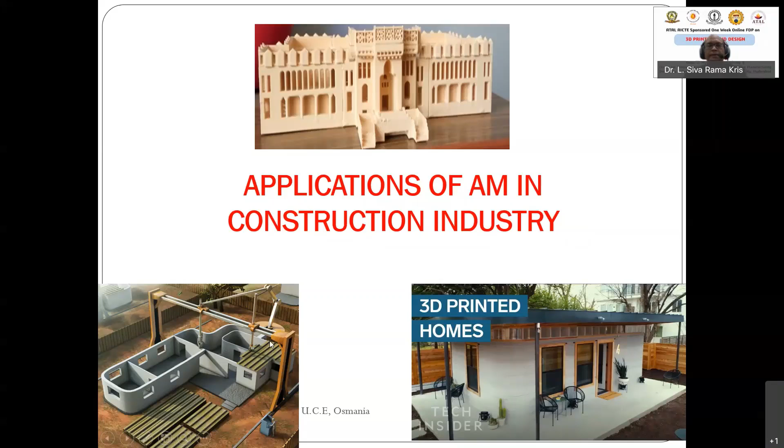So this is what we have done here, collecting the models, everything. I just want to show how we use 3D printing to produce all the parts in different components, and then join them together.

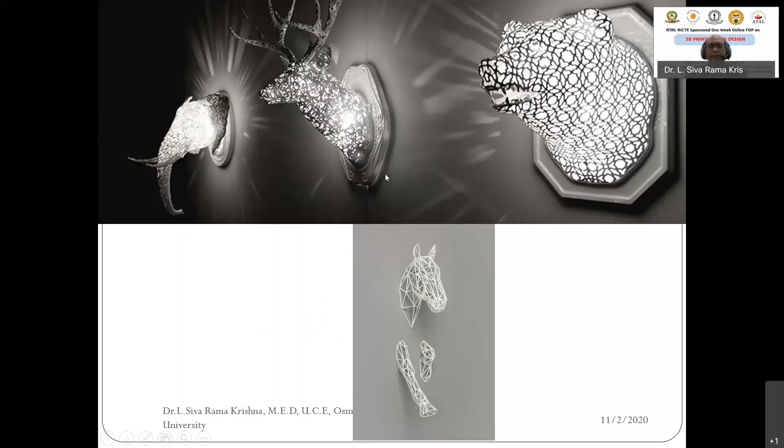And even in interior design this is used, see the interior coming out from the walls, etc. You use this technology because empty walls don't look good in your home, and you want something beautiful as soon as you go inside. So you make 3D printed interior decoration parts. In fact, some housewives are working from home developing these interior decorated parts and selling them through Amazon. That's how 3D printing has penetrated even into your home.

As I said this morning, someone asked about 4D printing. It's in the initial stage. The 4th dimension is time or temperature, or something which triggers and converts a 2D object into a 3D object - it could be electrical conductivity or something else that triggers the 2D part to become a 3D part.